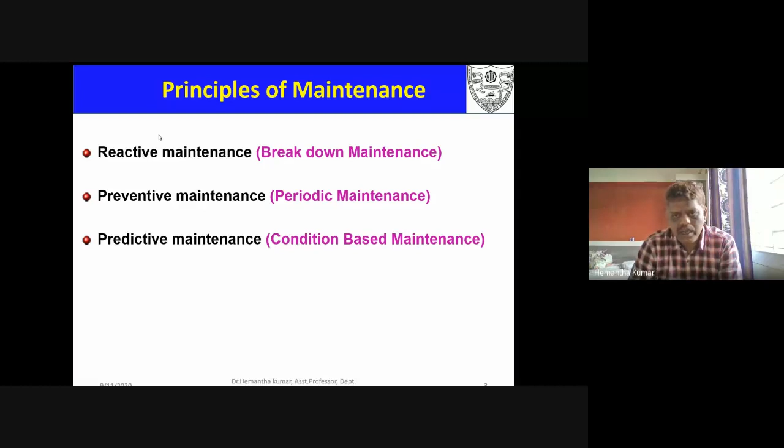So broadly, we can define condition monitoring. It is a bookish definition: continuous or periodic measurement and interpretation of data to indicate the condition of an item to determine the need of maintenance.

So it is as good as how we are checking the health of a human being based on parameters such as body temperature, blood pressure, or maybe based on the blood sample. Pathological tests will identify whether the person is sick or healthy. Similarly, we can also identify the condition of a machine or subsystem, anything, by some of the variables.

When it is in operation, it will emit certain variables like signals, which we'll call some information given from the system. Those signals will be processed, and we will identify from the signals whether there can be some defects in the machine, or it is running normal or operating in a healthy way. So this is about condition monitoring, and you can see the broad methods.

That means it can be based on visual inspection also; based on color, shape, texture, we can see whether something is having some problem or it is working fine, etc. You may observe this in day to day life with so many components.

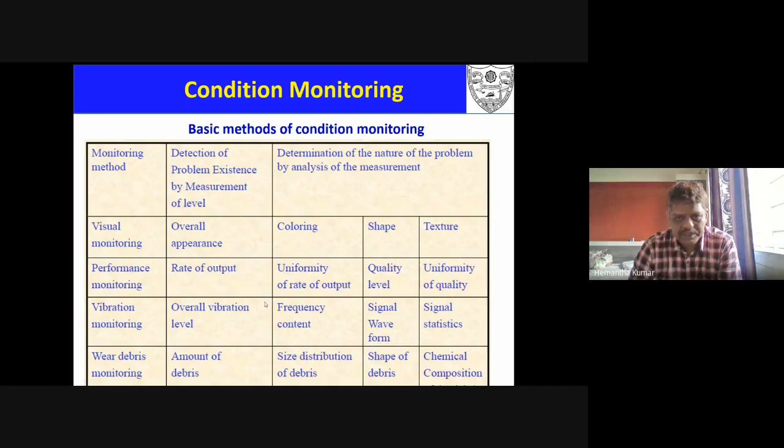In condition monitoring, we may measure pressure as one of the variables, vibration as a signal as already told, and thermography, performance monitoring, oil analysis, motor current signature analysis. All these are some of the signals that we can use for condition monitoring.

So again, I have given some techniques available: vibration analysis, acoustic emission monitoring, and sound monitoring. There is a difference between sound and acoustic emission. Motor current signature analysis, cutting force signal, particle or wear debris analysis, radiography, performance monitoring, oil analysis, ultrasonic monitoring, thermography. So around 70% of condition monitoring systems are based on vibration analysis; the remaining 30% is occupied by all other techniques.

So let us move on, because this all comes under different topics; NDT techniques are also used, like radiography, ultrasonic, etc. We'll not talk about them because that is not the scope of today's lecture.

So fault diagnosis broadly we can define as detecting, isolating, and identifying an impending or incipient failure condition of the affected component or subsystem in the system. Suppose you take an example of a fan. There may be some noise coming out of the fan. What is that? You observed a noise that is coming out of the fan.

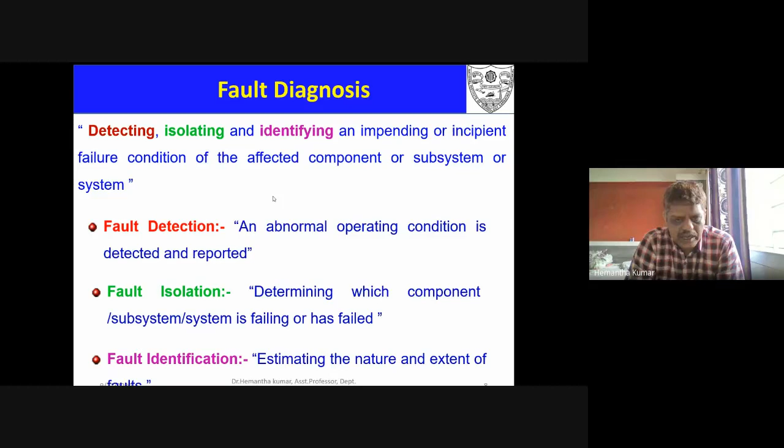Okay, now next is the prognosis. Prognosis is the ability to predict accurately and precisely the remaining useful life, that is RUL. Suppose we know the kind of application, we know how to measure the life of the bearing, or how to estimate the life of the bearing in terms of number of revolutions for our application. So from the condition that we have assessed, we can say these many hours or these many revolutions it may run without any problem. That is nothing but residual life, remaining useful life. That is nothing but prognosis.

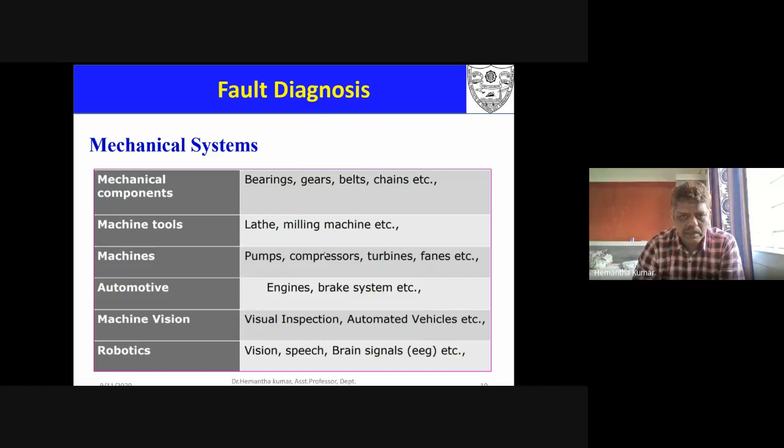So fault diagnosis is applied to mechanical systems like bearings, gears, belts, shafts, all these members, machine tools, machines, automotive, robotics, machine vision. In all these cases we can apply fault diagnosis. Literature you can find in this fault diagnosis or condition monitoring domain. I have just made this wide classification, but it is not limited to this. There are many more techniques in signal processing or machine learning. Just for this lecture, I have made this kind of diagram.

In fault diagnosis, there are two broad classifications. One is model-based methods. Another one is signal-based or data-driven methods. The majority of fault diagnosis systems are based on signal-based methods. Why? Because it is very difficult for us to build a mathematical model or any virtual model for a complicated system. In reality, when we apply a condition monitoring program, the machine may have so many subsystems, intricate parts, etc. It may be difficult to represent it as a computer model or mathematical model. So model-based methods are somewhat limited in application.

Majority are signal-based methods. Model-based methods may use a mathematical model, a finite element model, or a multi-body dynamic model. There are only a few cases of multi-body dynamic models published in the literature. Finite element for beams and plates, there is a little literature you can observe. And model-based fault identification techniques also have little literature. The majority is signal processing techniques in conjunction with machine learning techniques, or signal processing techniques alone.

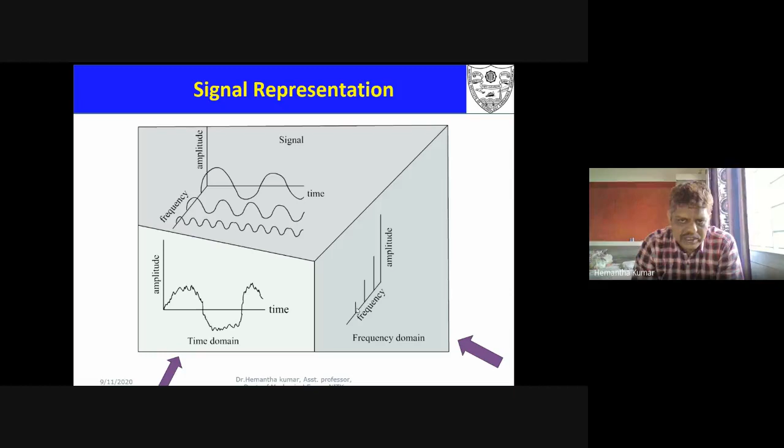This is about representation only. Suppose you have three harmonic waves, three sinusoidal waves. If you are looking from the front, how do you observe this? Three harmonic waves superimposed will look like this. It's not the correct way to see; it's like a side view. But think as a mechanical engineer: if you are observing from this front, you can see there are three frequency components, right?

So how we can convert time domain to frequency domain, all may have been knowing, but still we can use what is known as the Fourier transform. The acquired data in time domain we can use to get the spectrum, that is nothing but frequency domain. This is for continuous signal, and this is for discrete signal. And if you know the information of the signal in the spectrum, you can get the signal in time domain by using this formula. This is for continuous signal. We call this the inverse Fourier transform. This is for discrete Fourier transform, right?

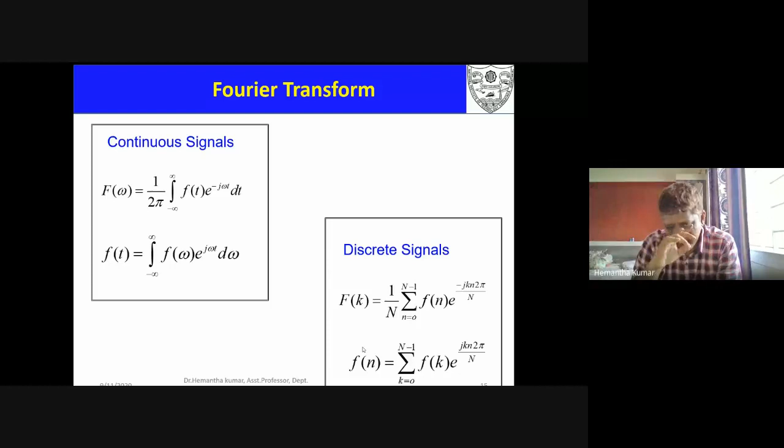If you are using MATLAB, you may be having the function FFT. FFT is one of the algorithms which gives us the frequency domain from time domain. Fast Fourier transform works based on the Fourier transform. We can use this FFT command to convert a time domain signal to a spectrum. What this spectrum gives, let us see.

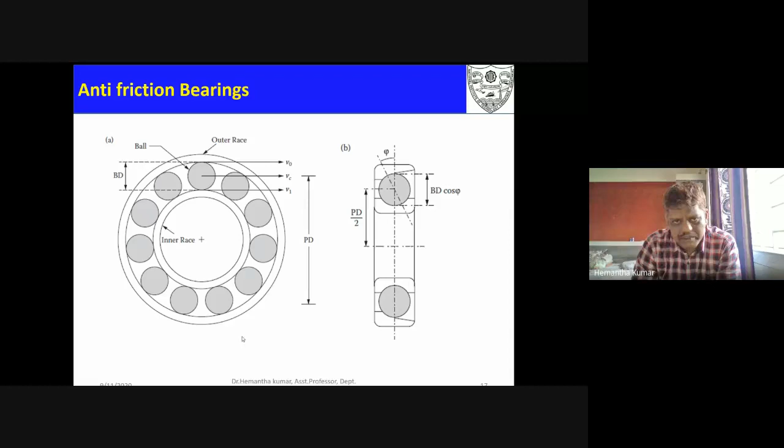Let us take an example of a bearing, any ball bearing you may get from any store. The diameter of the rolling element, outer diameter, inner race diameter, all will be known from the maker. With the help of ball diameter, pitch diameter, all these things, you can estimate FTF, fundamental train frequency, BPFO, ball pass frequency outer race, BPFI, ball pass frequency inner race, and BSF, ball spin frequency. So you can calculate these characteristic frequencies. These are widely available in literature; I have taken them from literature. So based on the RPM at which you operate, you are going to get the characteristic frequencies.

So take an example of any motor. We have used here a motor, an accelerometer and a two-channel FFT analyzer to acquire the data. For this we have used three cases: one is a healthy bearing, and the others are simulated fault bearings, one with inner race fault, another with outer race fault, just to acquire the data like this.

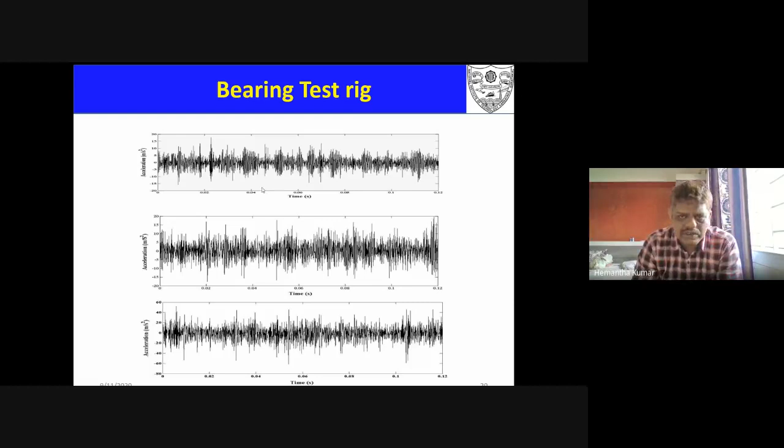If you are given this, it is very difficult from the time domain levels to identify which time domain signal corresponds to what, whether healthy, inner race fault or outer race fault. Since we have simulated and acquired it, we know that; otherwise, with the signal itself, it is very difficult to say. Now the first one corresponds to good, the second one inner race, and the third one outer race fault. Let us see now. This is from the data you can get from maker brochures.

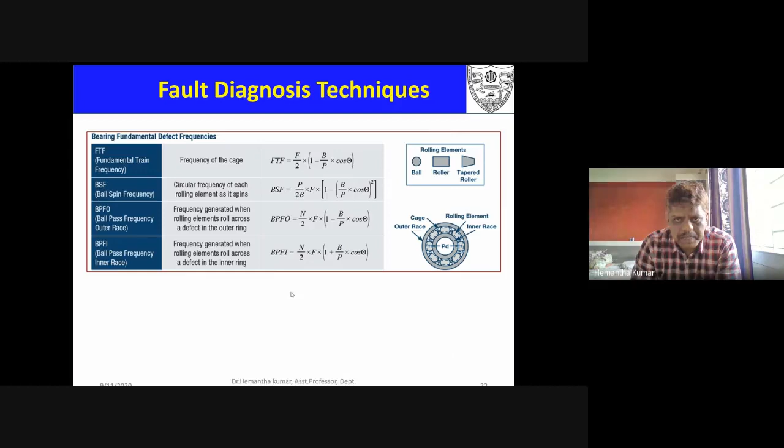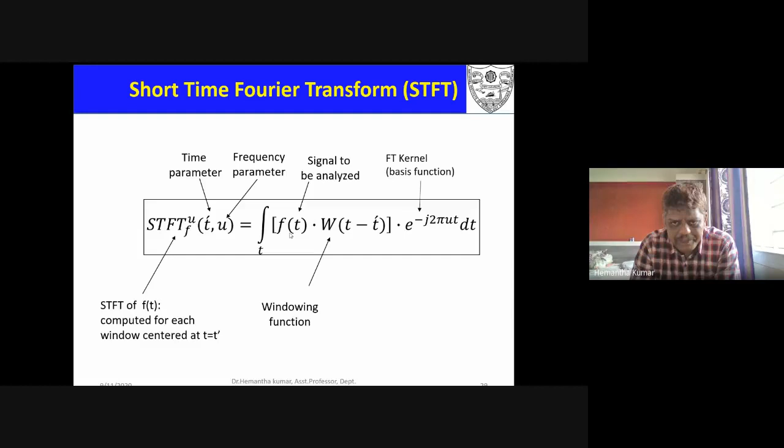So now there are two things. In the short time Fourier transform, a big challenge is the type of window, whether we are using a narrow window or wider window, or a rectangular, parabolic, elliptical window, etc. Sorry, Gaussian window. And then what is the kind of shape.

Now let us see a narrow window. With a narrow window we get better time resolution; approximately we are able to say when this frequency change happened. But if you use a wider window, we get better frequency resolution but poor time resolution. That is the disadvantage. So there should be a compromise in choosing window size. All these things are explained here, like the type of the window and the size of the window.

Wide window analysis provides poor time resolution and good frequency resolution. Narrow window analysis provides good time resolution but poor frequency resolution. We may use a rectangular window, Hanning window, elliptic window, or Gauss window.

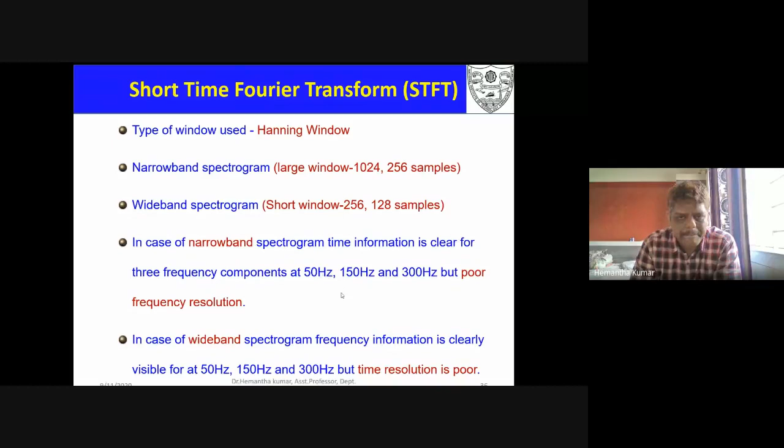Okay, now the Heisenberg principle of uncertainty. There are so many certainty principles, like Einstein's, which come under certainty principles. That means they have developed some mathematical model, so you are able to predict the response at any time. In the case of the uncertainty principle, it is very difficult for us to get both time and frequency. This is the case in signal processing.

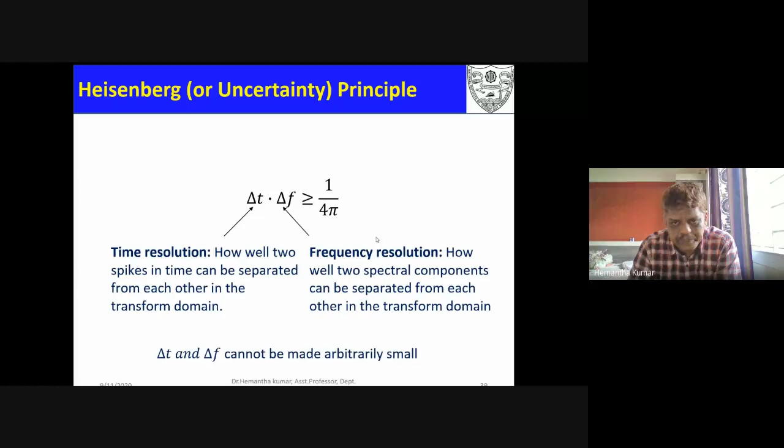The uncertainty principle name came from quantum mechanics, or physics. It is also applicable here because we will not get both time and frequency at the same time instant. So one cannot know the exact time-frequency representation of the signal. We cannot precisely know at what time instant a frequency component is located. We can roughly estimate.

So, the wavelet transform. As you know what a wave is, a wavelet means a short wave. This is why we have seen STFT; you will understand now. We have seen what translation is, right? In STFT, we have seen that with a narrow window we get better time resolution, and with a wide window we get better frequency resolution.

Is it possible to get both good time resolution and good frequency resolution in the same plot? Yes, we can do it with the help of wavelets. Still, the Heisenberg principle holds good, right?

Now, in mathematics we have functional analysis, where we can see these kinds of similarity functions. Suppose f1 is one function and f2 is another function. If you compare f1 to f2 point to point and check the similarity: if both functions are similar, the value of similarity is 1. If both functions are dissimilar, the value is 0. Anywhere in between, you get between 0 and 1.

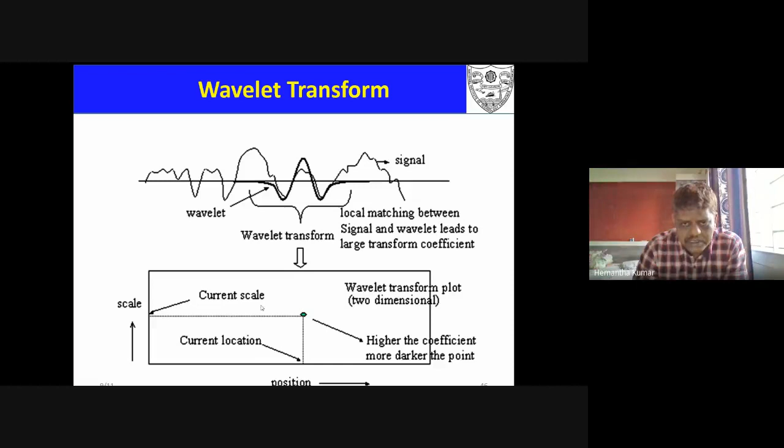And you stretch the wavelet and repeat the same process, translating from left to right. Again, you are going to get a series of similarity values. Further you stretch, you are going to see one more row of similarity values, right? So if you are plotting scale versus time, you are going to see a lot of values. It is very difficult for us to represent it on paper, so many similarity values. We use colors or a scalogram for representing similarities.

This is frequency and time. And with the suitable wavelet, you can identify where the frequency is and at what time this frequency component is coming. Both time and frequency information you can get from this wavelet.

Okay, we have used this in the case of a single point cutting tool, right? One of the defects we created was with tool flank. We simulated the fault. That means we created the fault and acquired the time domain vibration signal, and used wavelet transform to identify where the frequency is and at what time it is occurring. Both information we are going to get in this kind of wavelet plot.

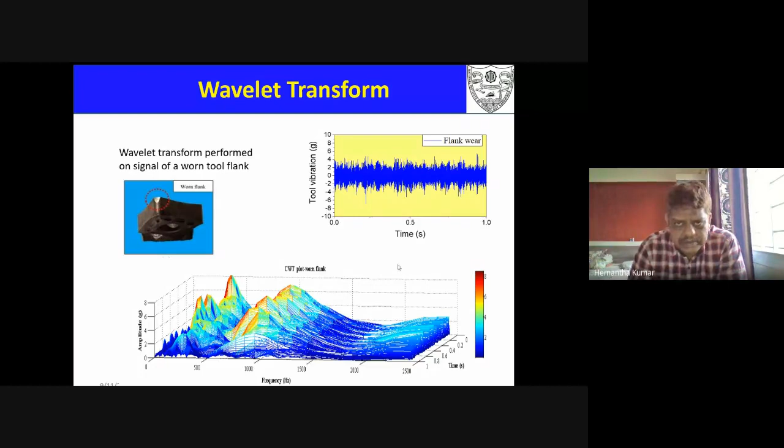Okay, coming to one more technique, that is cepstrum, which is used, for example, in a gearbox where there are multiple components. There are so many gears, counter shaft, main shaft, then so many bearings, etc., supporting all the rotational elements. You are mounting an accelerometer in the bearing location or on the casing, acquiring the data and performing FFT. And you can observe there are so many sidebands.

Okay, these sidebands are nothing but modulated to some carrier frequency, etc. So to know exactly which component is failing, we require this kind of cepstrum analysis. It is very difficult with only Fourier transform or FFT. So cepstrum is the inverse Fourier transform of the logarithm of the estimated spectrum of the signal. Roughly we can call it a spectrum of a spectrum.

Cepstrum, you can see the first four letters, CEPS, are like a reverse of SPEC. Spectrum, it's just reversed.

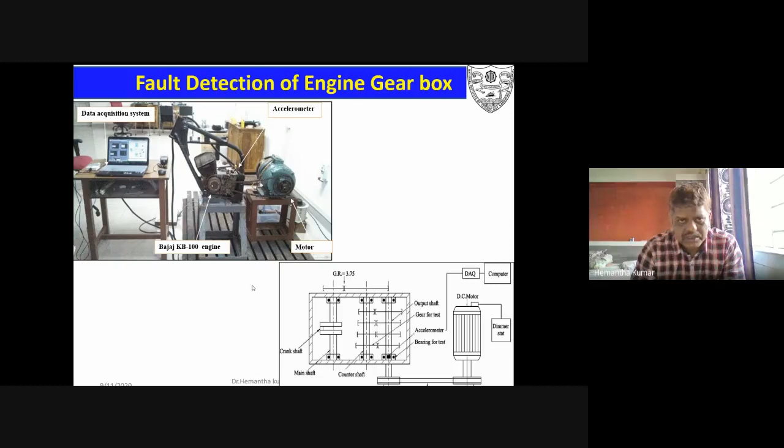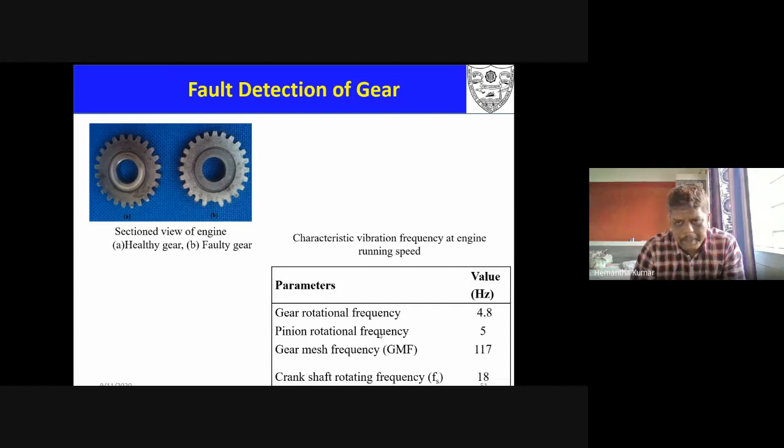One gear we used was healthy; in another one we created a fault. This is the layout of this gearbox. One of the gear teeth we have removed. You can see the gear rotational frequency, gear mesh frequency, all these things. We acquired the vibration signal for the healthy gear and performed FFT. We see the drive spin frequency, that is nothing but the driving frequency, and its harmonic components, and you can also see the gear mesh frequency, right?

And when we perform this cepstrum analysis, we got this kind of plot. See, the x-axis is now quefrency. Earlier we called these harmonics of the driving frequency, like twice the driving frequency, thrice, all those things. Here we call them rahmonics, which give us the periodicity of the signal. And when we perform a wavelet, we are able to get both the frequency and time information.

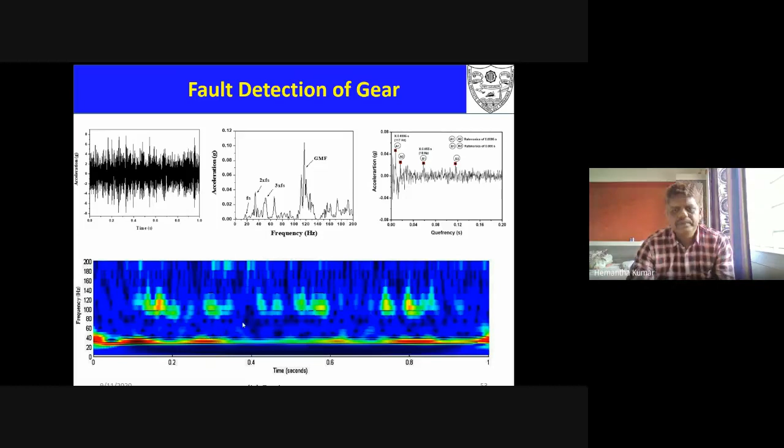Coming to the machine learning approach, here we are using artificial intelligence techniques along with signal processing techniques, so we can automate the process. We acquire the data and analyze it offline with the help of FFT or wavelet, etc., and it may take time. So instead of manual analysis, we want the computer to take care of all the stationary and non-stationary signals. We can build a fault system capable of handling non-stationary signals or external noise. Even if noisy signals are present, it should be tolerant enough to take care of that.

I hope Dr. Sukumaran may have explained this, but still, this slide shows an overview of how machine learning can be used. You may have seen this kind of algorithm or flowchart in many papers or literature. For a machine or structure under a fault diagnosis program, we use suitable sensors. They may be accelerometers for vibration signals, or if you are using other signals, the corresponding sensors and a data acquisition system.

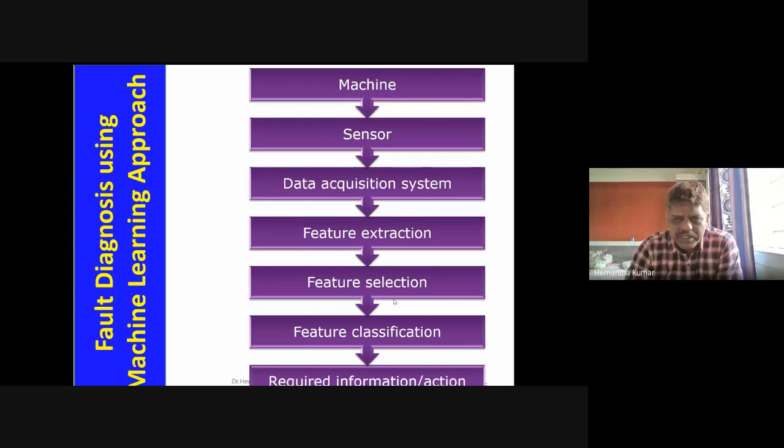We use the decision tree technique for feature selection, right? And there are many classifiers available, like artificial neural network, Bayes net, support vector machines, etc. We can use any of these algorithms for feature classification. So to build any hardware based on this machine learning approach, we can use the information provided by this machine learning method to support the hardware.

Okay, and again, we may use a vibration signal, sound signal, acoustic emission signal, or cutting force signal. There are two ways: naturally occurred fault or simulated fault. Naturally occurred fault means a fault should occur in operation, and it is very difficult because it may take a long time for that kind of fault to be observed. So based on our experience and the literature, we can simulate such kinds of faults in the machine element and train the machine learning algorithm, etc. So that is the idea.

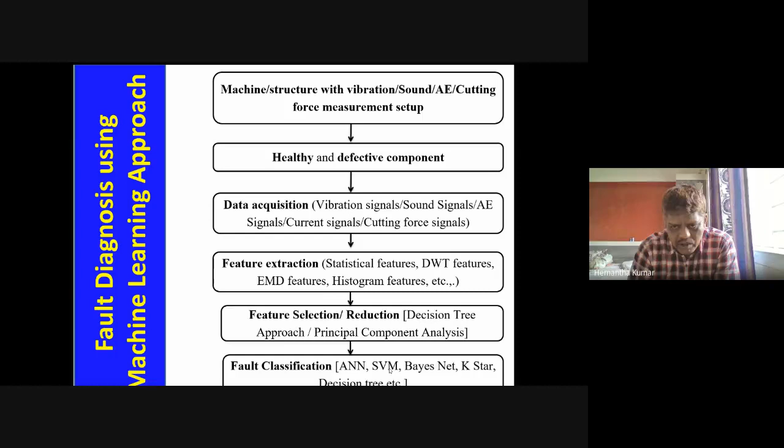Healthy and defective components; for data acquisition, suitable data acquisition systems are used. Feature extraction: as I told, statistical features, discrete wavelet transform features, EMD, or histogram features we can use. Feature selection: we may use a decision tree or PCA, principal component analysis. Fault classification: here we can use all these algorithms as a classifier. That is an overview of this machine learning method. I think Dr. Sukumaran may have given more details.

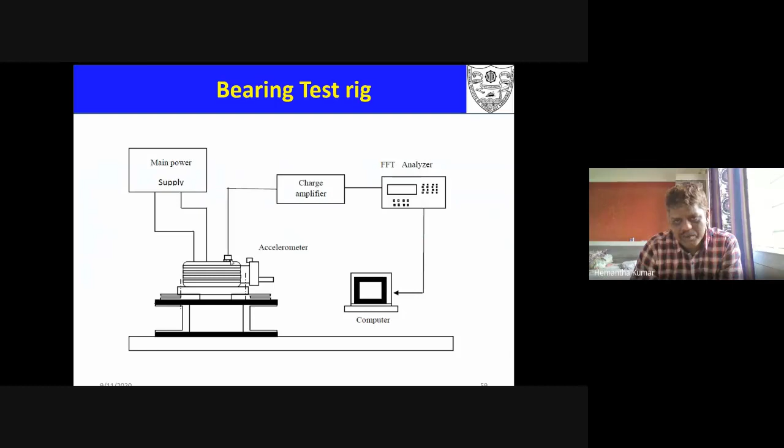So one case study I would like to present. The same bearing that we have seen in the case of signal processing with the time domain spectrum. Similar setup, similar data for healthy, inner race fault, outer race fault. Statistical features of each signal will be extracted: standard error, standard deviation. I think fundamentally you know all these things. Variance, kurtosis, skewness. Each can also be used for diagnostic information.

Maybe kurtosis alone people will use, since it will give you the spiky nature of the signal. Kurtosis alone can be used for diagnosis. Skewness, all these things can be used alone also. Then range, minimum value, maximum value, sum. All these 12 features can be extracted for each signal. And with all these extracted features, we can use the decision tree technique to identify which are the dominant features.

This also I think Dr. Sukumaran may have explained, so I am skipping all these things. We're going to see a tree-like structure. The root node, the criteria for split and all, he may have given information on. I spoke with him also, I discussed. So I'm skipping this. So decision tree works basically based on information entropy and information gain. These things Dr. Sukumaran has told, so I am skipping. So we're going to observe the decision tree like this.

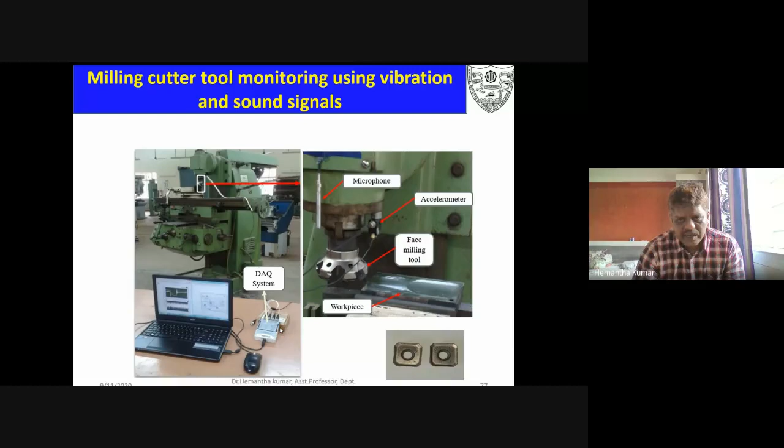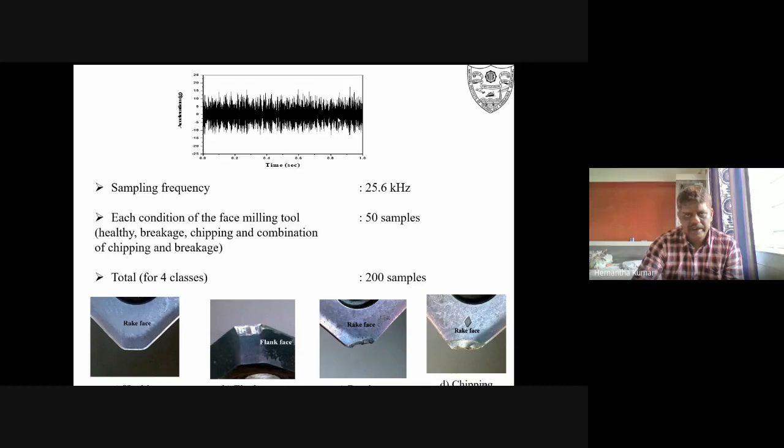So while milling, we can acquire the vibration data, and we also acquired the sound data with the microphone. We used an NI based DAQ system, data acquisition system. You can see the different kinds of faults we have induced: flank wear, breakage, and chipping. All these are simulated faults. For each case we have taken 50 samples. For these four classes we have 200 samples, and for each sample we acquired vibration and sound data.

And with so many features available, which are the best features, that also we need to identify first. For that, I have chosen here statistical features, EMD features, and DWT features. EMD, empirical mode decomposition.

And in discrete wavelet... we have discussed continuous wavelet. In the case of discrete wavelet, we can decompose the signal into different levels of approximation and detail, where A is approximation and D is detail. This is all applicable in the digital domain. Whatever we have chosen in the continuous domain, like translation as well as scaling, is applicable here also in the digital domain. So we are able to get different decompositions of a digital signal; that we call the discrete wavelet transform.

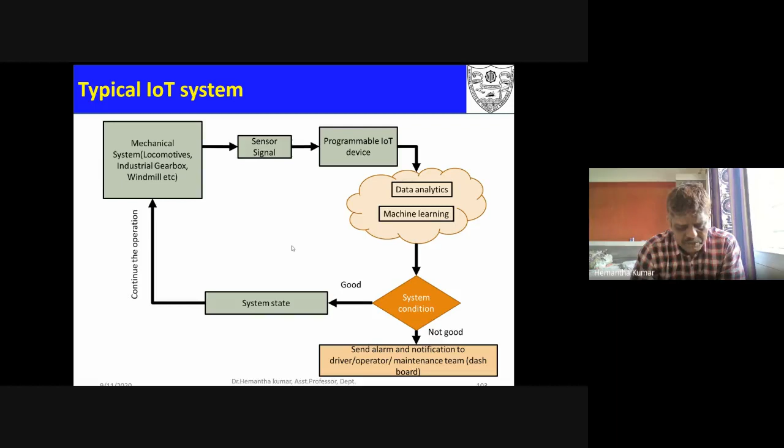Many machines' data may be shared here in this cloud. And finally conclusions are drawn using machine learning methods. If it is good, then it is allowed to continue. If it is not good, the process or automation will send alarms or notification to the operator. That's about a typical IoT system. Nowadays many people are working on IoT systems for fault diagnosis.